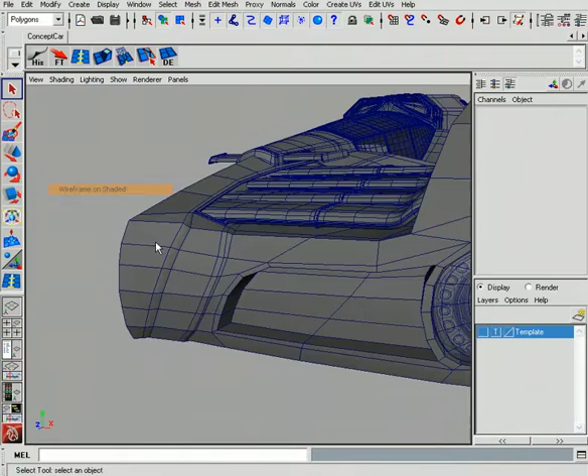The first thing I'm going to do is take this piece right here and create an inset for this as well. Let's go ahead and pull this point down a little bit so it gives it a bit more shape.

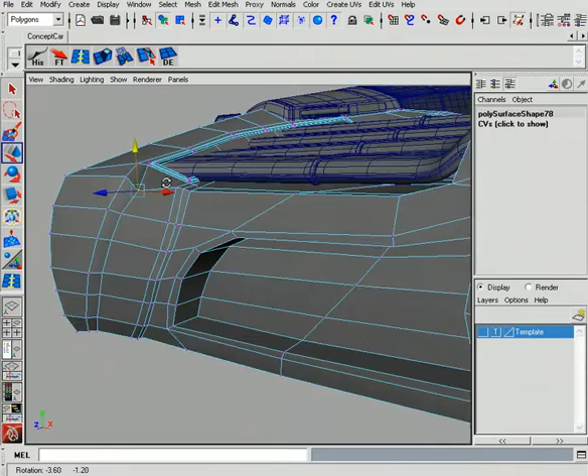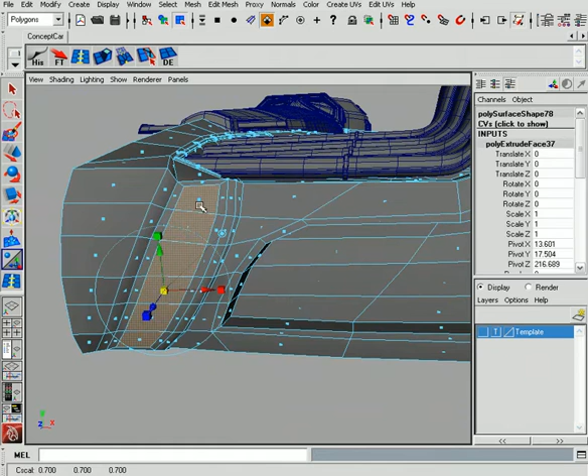I'll do a little bit of shaping there, and then I'll take these faces right in here. Let's go ahead and extrude those in, and we can move these points down a bit if we want to, just to give us a little more space there.

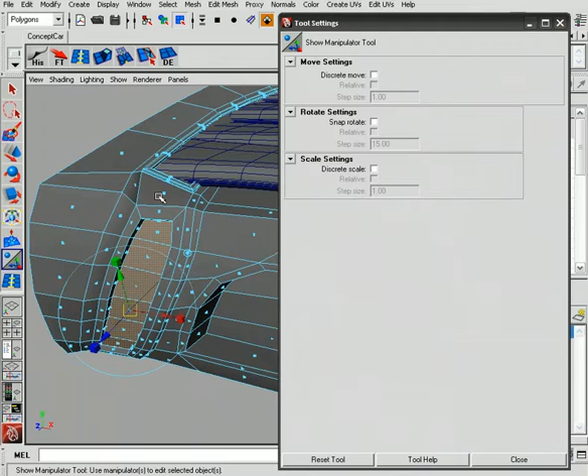And I'll take these faces and push those in, and push them in just a little bit more. Let's go ahead and extract that piece so we can treat it separately.

Go ahead and center that pivot, and let's scale it up a bit so it kind of intersects.

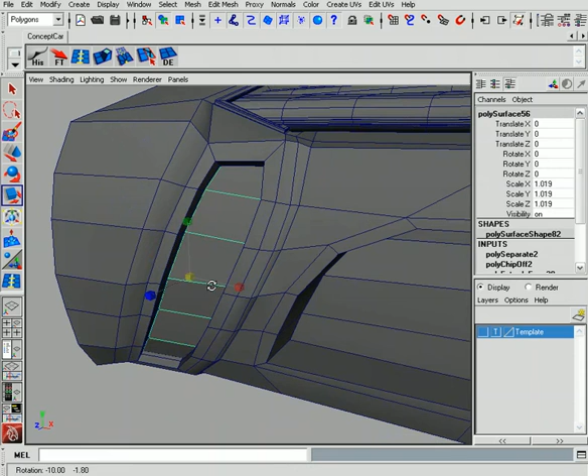Now let's take this row of faces that we just created and create a little rim inside here. That's just going to add a little bit of detail, so when you look in here you'll see it.

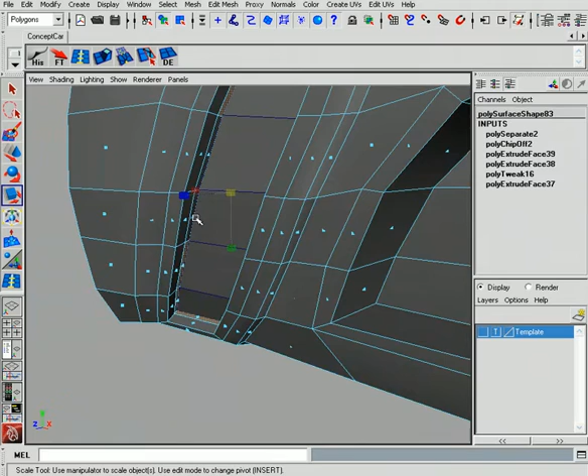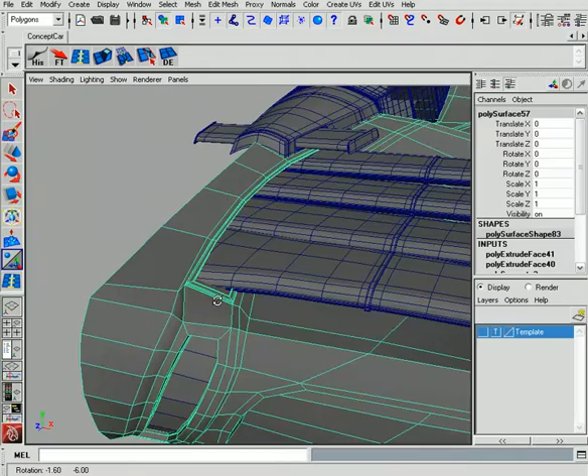Okay, just a little bit like that, so that when we then come in and smooth this, you can see that. Kind of like so. Alright.

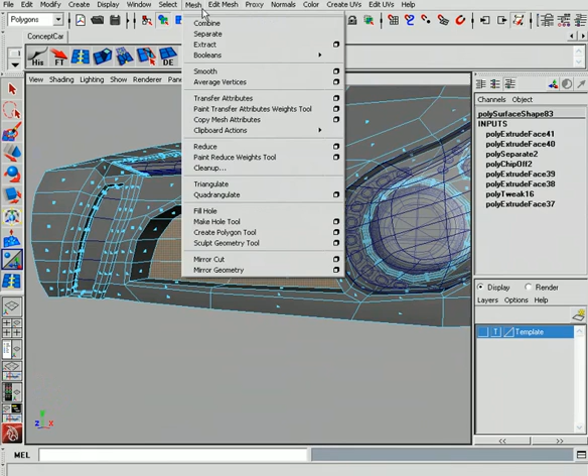Now in here, do kind of a similar thing. Let's go ahead and select the back of this guy, and let's go ahead and extract this piece.

Let's go ahead and center the pivot and move it out. We're going to use this to create a couple of pieces, but first I want to straighten out this right here, so I'm going to just draw this in, kind of more like that.

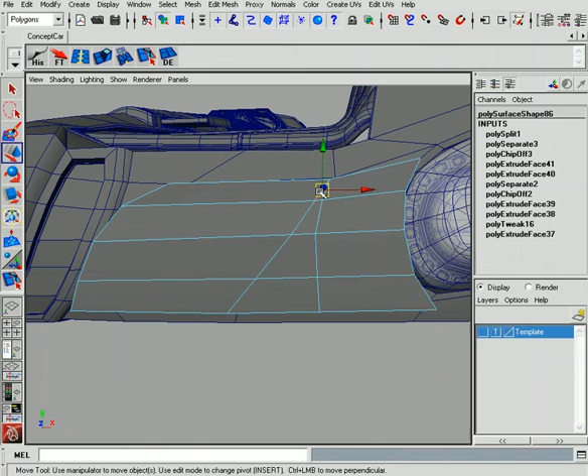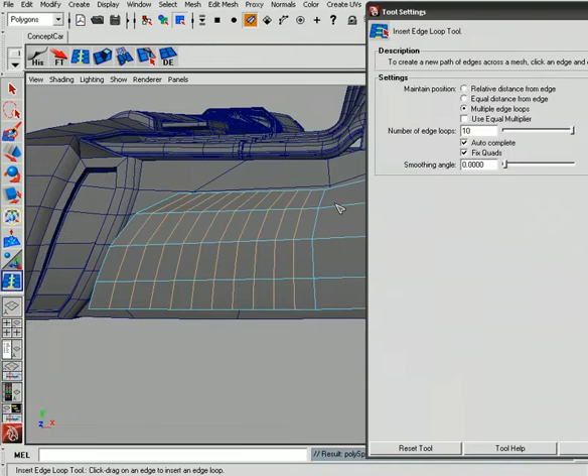Delete that. Now I want to insert some edge loops in here. I can either come in and do this manually, or I can go into my Insert Edge Loop tool and do multiple edge loops. Let's say I want to do maybe 10. And let's do 10 — I want a bunch of edge loops in there.

Before I do that, let's actually duplicate this, and we'll do our workup on this one, just so we have a clean copy of this. So again, we go to our Insert Edge Loop tool.

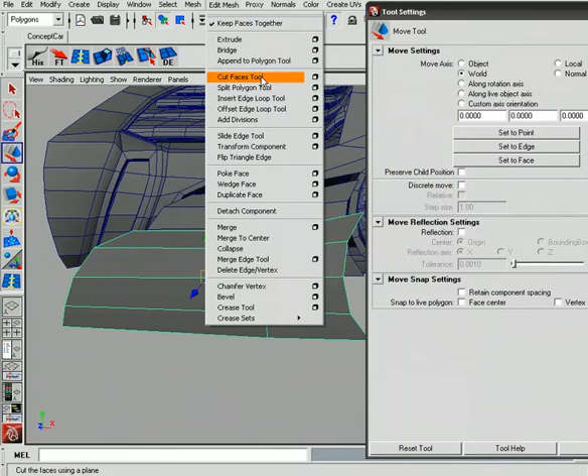Maybe 20, just so they're evenly spaced here, and then maybe 10. Do 20 here — oh, looks like we can only do 10. So we'll do maybe 5 here.

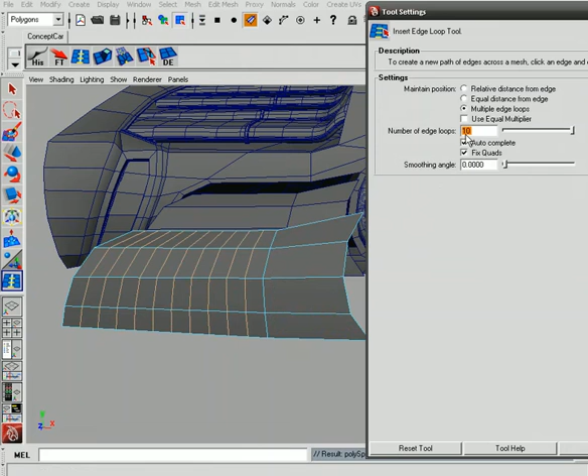Okay, now what I want to do is just kind of pick some of these. Let's go ahead and select the Edge Loop tool — I'm going to use this one. So let's go ahead and just kind of delete every other one.

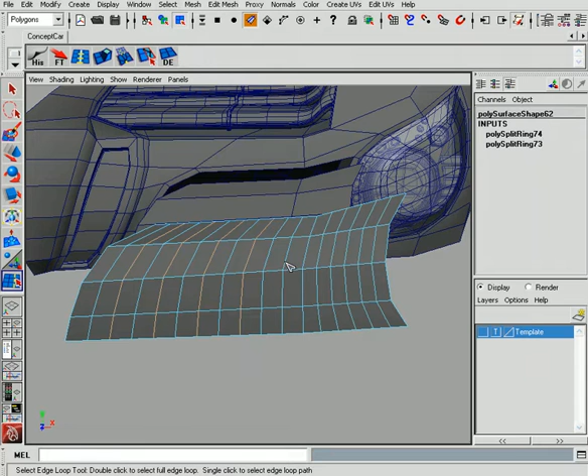So click off of here. Let's keep that one. Let's delete every other edge here.

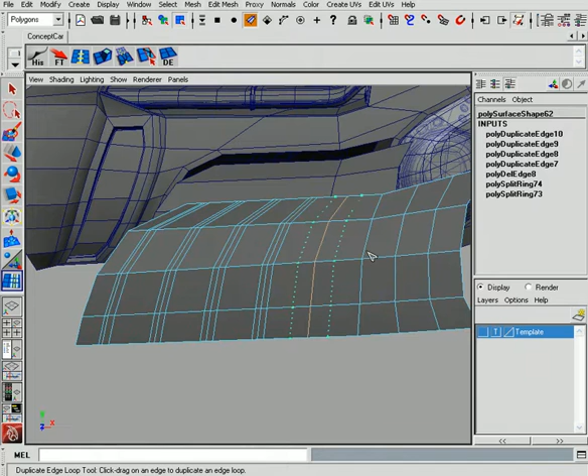Now let's use our Offset Edge Loop tool, and we'll create just a couple strips around the lines that we have left. Pull that across, and try to make them basically the same size there.

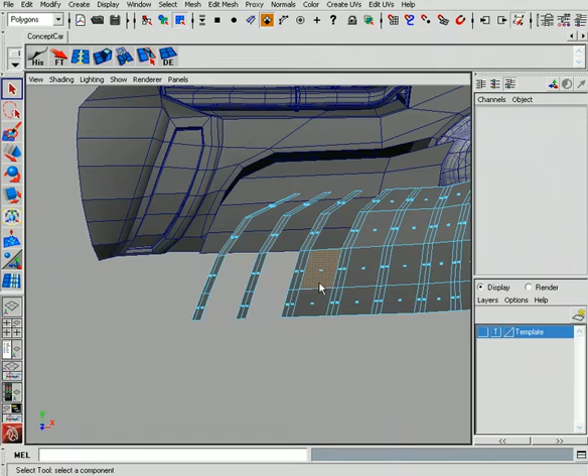Then we can delete anything that's not in one of those strips — go ahead and just delete those. And all of this material in between we can get rid of, just delete all of that. Now these guys we can extrude.

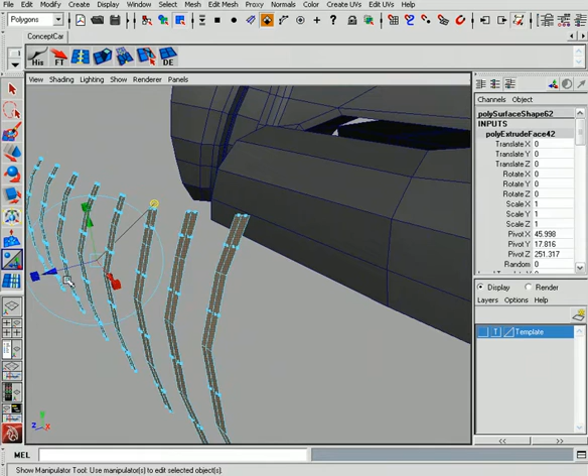And extrude again. Pull that all the way back. Delete those faces in the back, and we can delete the faces on top.

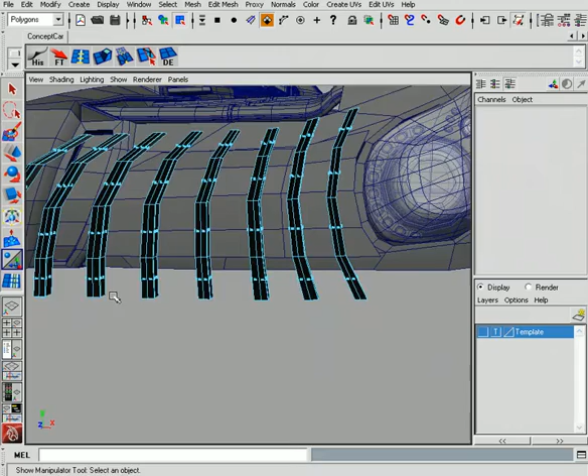Okay, get rid of those faces on the bottom. And then we can reverse our normals. You can see it's black, showing us that those normals are reversed, so go ahead and reverse those.

Okay, and now we can smooth them out. You can see that's sort of what we get.

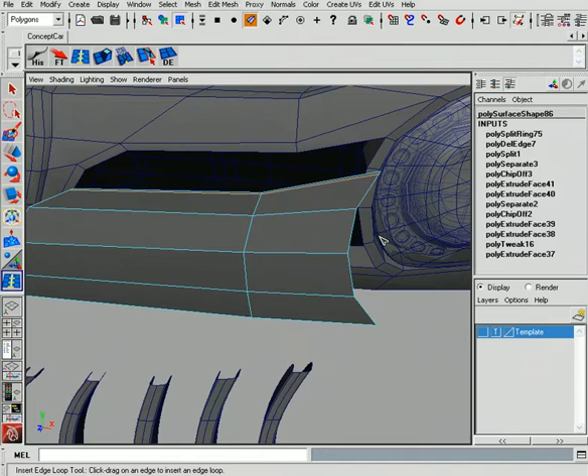Okay, if we take this now and we want to go ahead and smooth it, we can insert some edge loops around the edges.

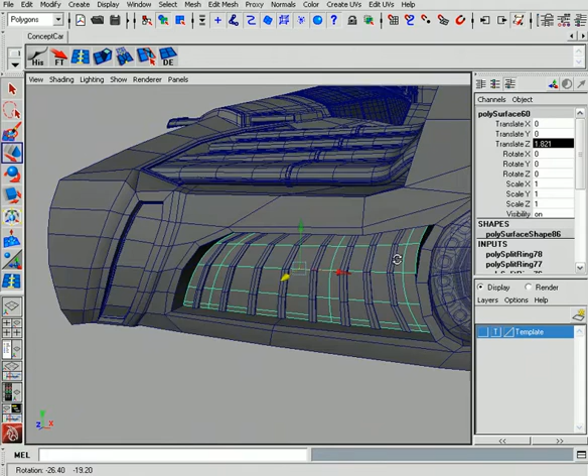Okay, let's go ahead and move that back there, and we'll move this back as well. Let's bring it forward, and bring this forward as well. Okay, let's go ahead and smooth that and smooth that.

And if we want to kind of shape this a little bit more, we can take these and go to our animation, create deformers, and let's create a lattice.

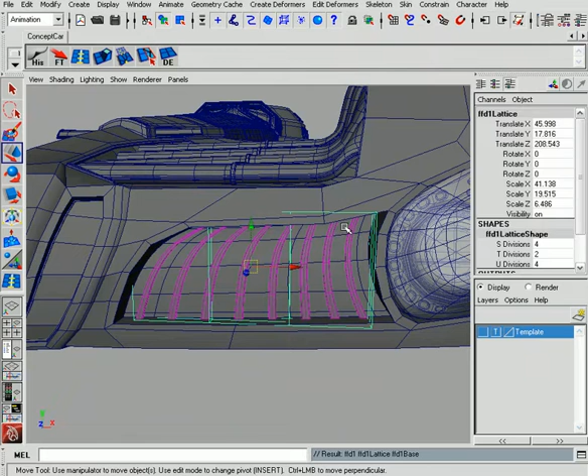Okay, we need a couple more divisions there, so we'll create a lattice 4x4x4.

Take our lattice points and kind of move these over so that's a little straighter, not quite as curved.

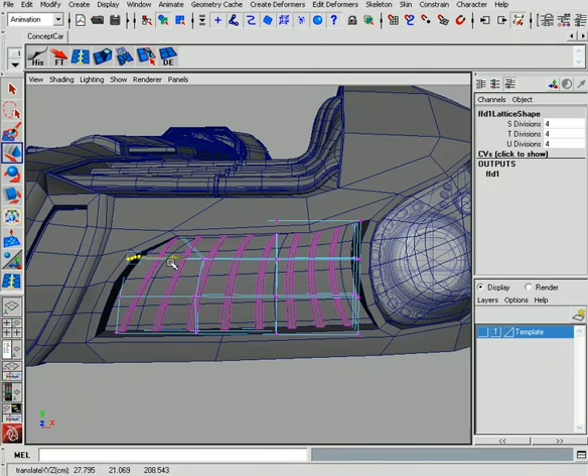Okay, although it might be nice for it to follow this curve over on this side, so we can just shape this a little bit more.

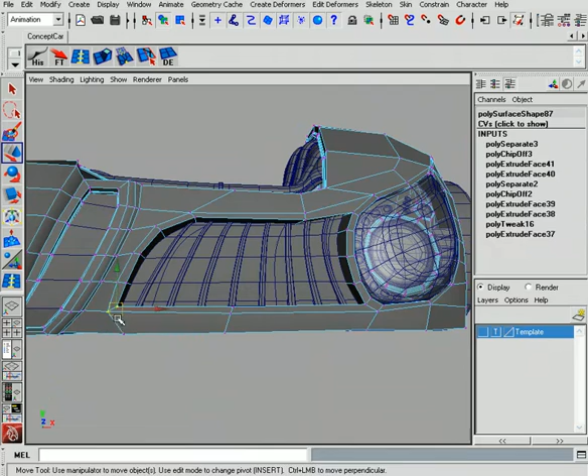Okay, let's go ahead and pull this down, this part of the grill. Grab those points in there, and pull this down a bit.

Then we can take both of these and create our lattice, pull that down. Okay, go ahead and delete that history.

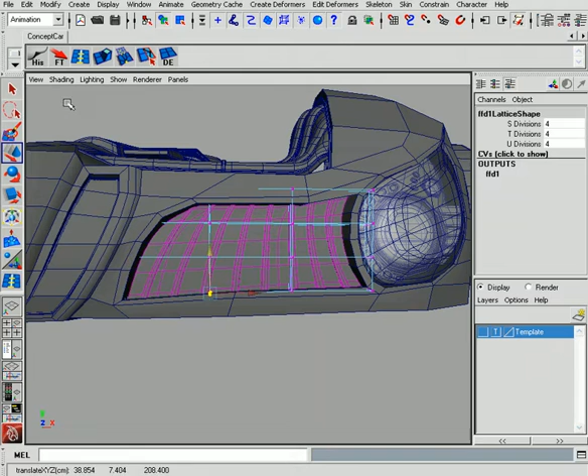Let's go ahead and create a rim inside here as well, so we can go ahead and create a rim right there, and go ahead and select those faces. This is going to be the same thing that we just did with that other little inset over there.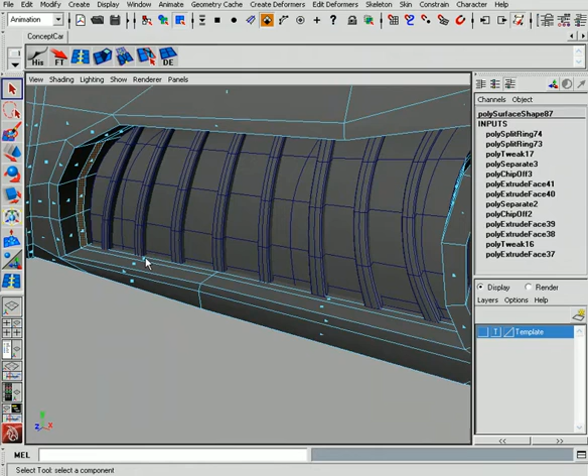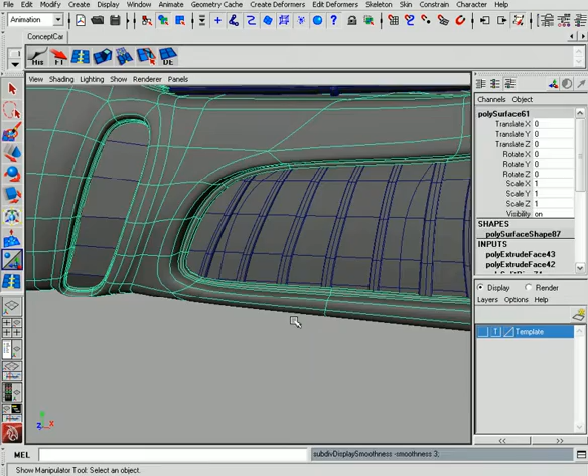Go ahead and just select all of those faces all the way around, extrude those in, and then in again. You can get it - a nice little rim inside there.

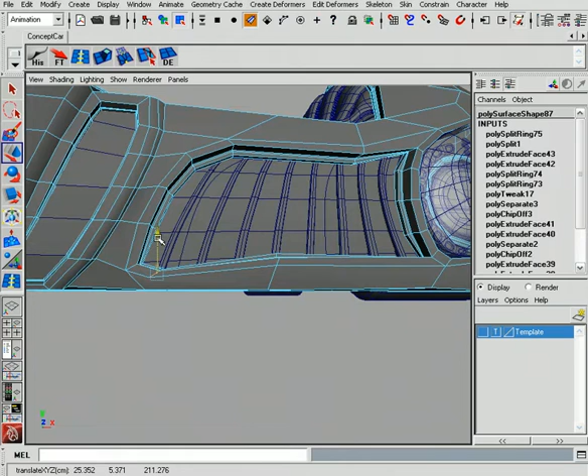Okay, and you might want to come in and shape this a little bit more, so I'm just going to put a line in there, and then I could insert an edge loop right in here, and just pull this down and in, and create a little bit more of a sharpness here.

We go to smooth this, and we can connect that up, and continue that on when we go to clean everything up. Alright.

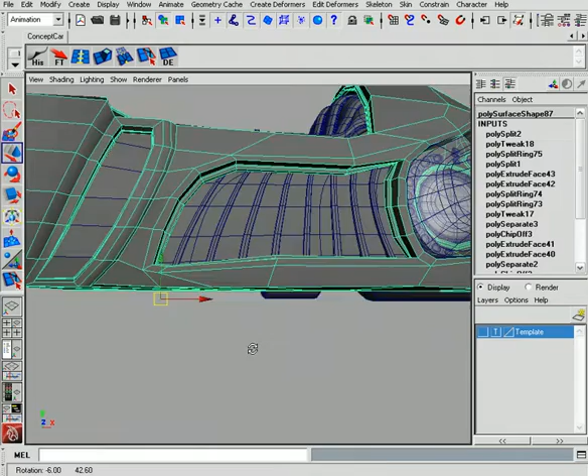So just play around with your front end and your grill, but we were able to use the geometry that we already had to build these little pieces in here, as well as these sort of pieces.

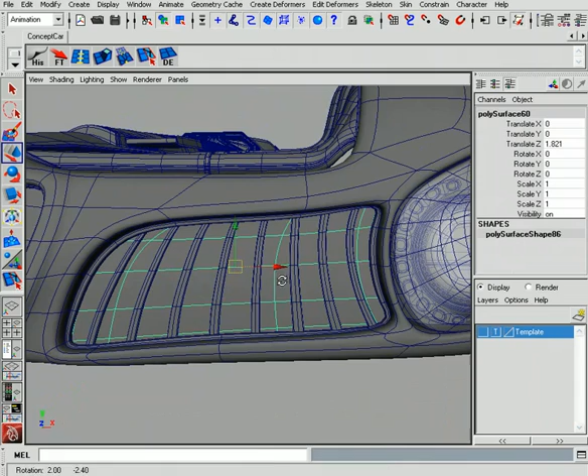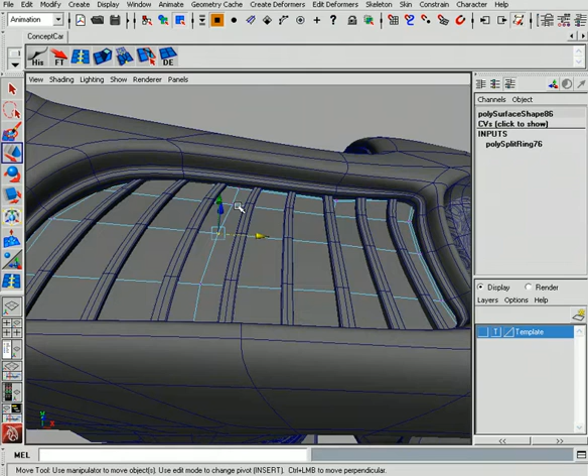And what you could also do is kind of match that up and pull some geometry out from between here. So if you had inserted edge loops, for instance, right in here, if you had those straight on, you take your points and move them over, you could take those points so that it kind of comes out from behind there, right? So you can do that as well.

Have a line in the center of all of these. So once you get your grill sort of detailed the way that you want it, let's go ahead and move up and start to build a little bit of interior.

Now we don't want to go too crazy on the interior, but we just want to be able to see something because we have such a large area of open glass there on the canopy. We want to have some sort of detail inside there that makes it look like there's something in there. So we'll go ahead and start to work on that in the next lesson.